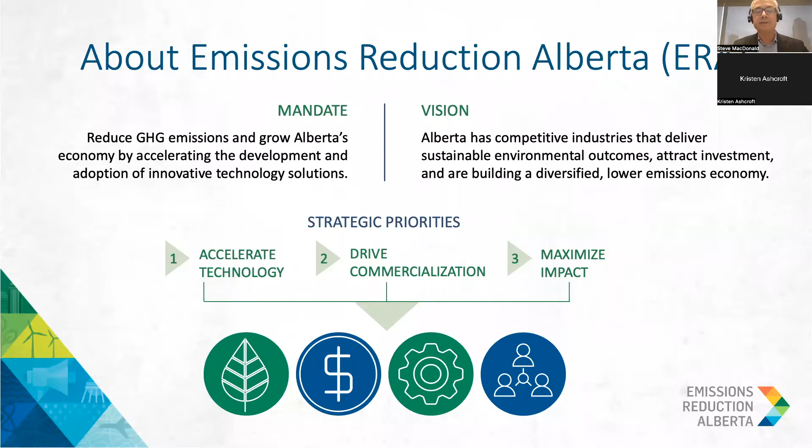We fund later stage technologies, which means we accelerate projects toward broader industry deployment and adoption by helping to de-risk those projects at the crucial pilot, demonstration, and scale-up stages of development. We're also very interested in the early stage innovation, which is why we are here today.

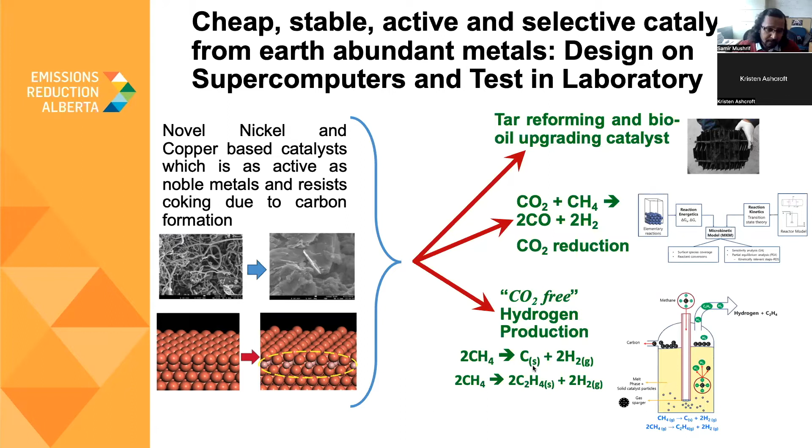So how does this support Alberta's emission reduction goals? Of course, clean hydrogen economy. Alberta is the largest hydrogen producer in Canada, with lots of interest by companies as well. But this hydrogen is produced via steam methane reforming. And the hydrogen production method that we are working on, you can call it turquoise hydrogen, if it is powered by renewable energy.

And the important thing to note here is that the catalyst that we are working on can bring the operating temperature of this methane decomposition down by about 300 degrees Celsius. It can facilitate decentralized processing.

And the other benefit is, if needed, this catalyst can be tuned to produce ethylene instead of solid carbon. The second is CO2 utilization, where we can utilize CO2 and make it react with natural gas to form syngas. And another promising technology that can bring down the operating temperature is tri-reforming.

And the other area is biomass processing and biofuels, where we are looking beyond bioethanol. And the problem here is that even the state-of-the-art technology today, if it produces bio-oil of a good quality, then the yield is only about 20%. If you take the yield up to 70 to 80%, the quality of bio-oil is poor, it has a lot of oxygen. And what we can provide is a catalytic solution to remove oxygen selectively and take the quality of bio-oil to a much better level, less corrosive, more stable.

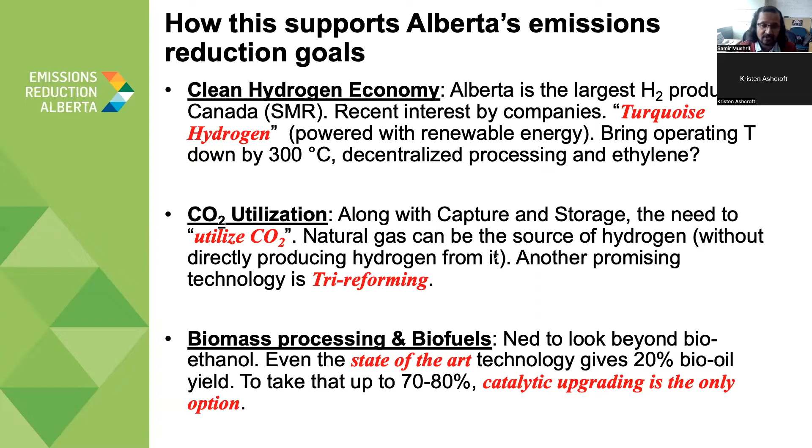And in terms of scaling challenges, we are still working at a laboratory scale right now on these catalysts. The catalyst synthesis process, testing it with real world samples, and doing further modifications and developing mechanistic understanding of the process or reactions. The challenges are to be able to develop these catalysts at a larger scale and then check the process level feasibility and techno-economic analysis.

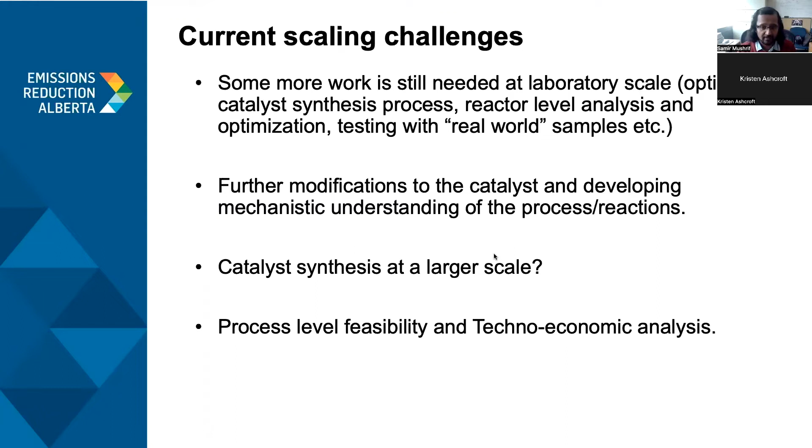And what we are expecting is some funding and collaboration to take our work to the next technology readiness level. In addition, we are also looking for opportunities to work in industry to solve industry problems. The expertise that we have in developing reaction mechanisms, pathways, and understanding can help solve some of the problems that you may have with respect to catalysts or reactions at your end.

And we have the expertise, and to perform these simulations, we have 5 million CPU hours per year to run these molecular simulations to understand mechanisms and pathways, which is about running 600 computers in parallel 24/7 for an entire year. I would like to stop here.

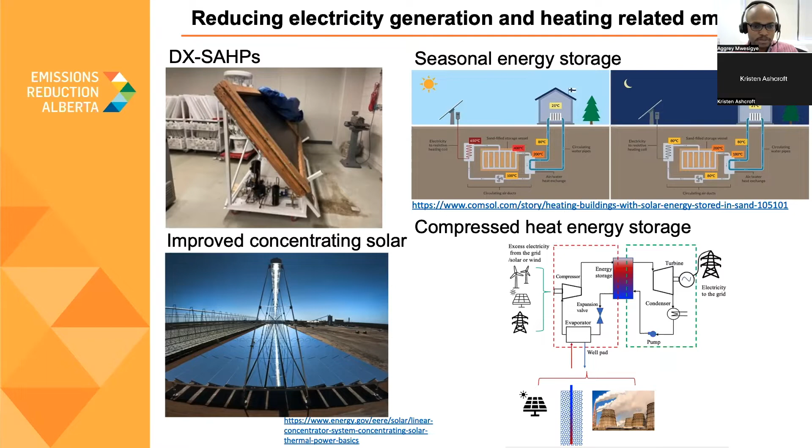Next slide. These systems support the emission reduction goals of Alberta because for buildings, we know that about 13% of our emissions in Canada come from heating and water heating, most of which comes from natural gas. So we are looking at systems that can have efficiencies between 400 and 600% and can also give you zero emissions if they are used with renewable electricity. We are also looking at solar thermal systems for reducing emissions from process heat, as well as electricity generation.

And we are working with one startup that is looking at using some of these systems for process heat in petrochemical processing plants. The other system on solar energy we are looking at is generating hydrogen from natural gas by using solar thermal cracking. And that is work related to what Samir has just presented. But in our case, we are not using electricity, but we are concentrating solar energy to achieve high temperatures that can easily crack the methane into hydrogen and carbon, eliminating the CO2 completely from the system.

For thermal energy storage, coupling the demand and supply for the intermittent renewable energy is one of the ways of increasing the penetration of renewable energy in our energy system. So we are looking at systems that we can use to store the energy from our system. Next slide.

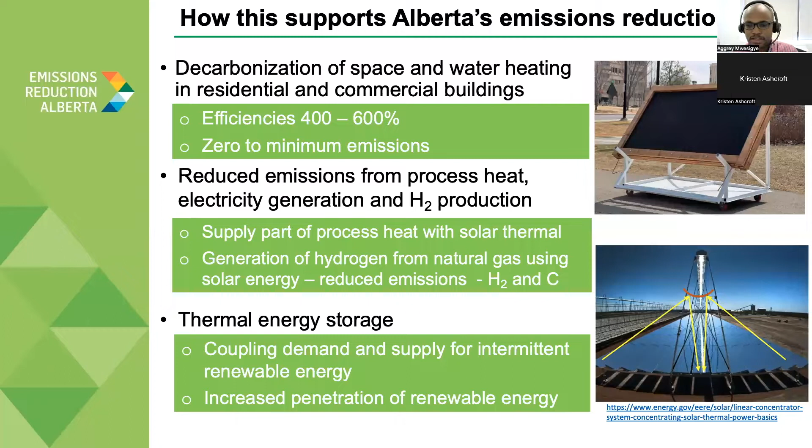So the current scaling challenges for these systems have to do with the costs, which are still higher. So we are looking at technologies that can reduce these costs and make them cost competitive. We need to demonstrate these systems in our climates. And also some of the clogging that happens for catalytic conversion of natural gas is something we are looking at and trying to address.

These are still new systems, like the compressed heat energy system is something that was proposed in 2014. So looking at sources and sinks for your energy is an important thing that we are looking at. And of course, industry and academia research partnerships are critical to success of the research that we are doing. Last slide.

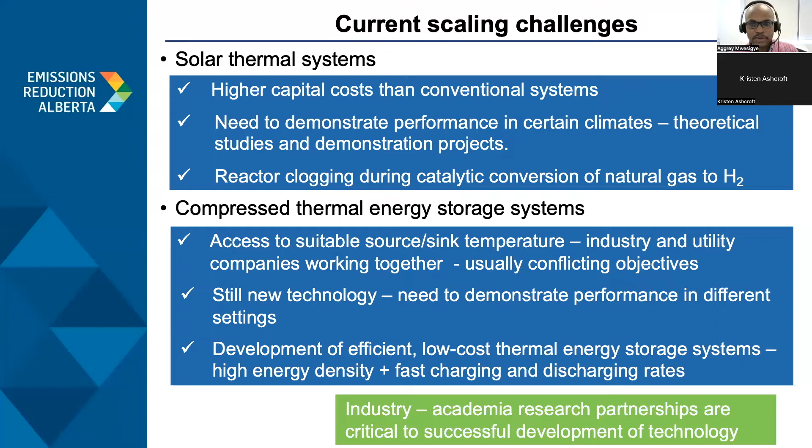So what we are looking for from this is a field test site to demonstrate the technology performance in our climatic conditions, using these lessons that are learned to develop new components and systems to improve performance, as well as develop capacity for manufacturing systems at a component level from Alberta, therefore creating jobs and reducing the costs. Also looking for industry and research partnerships for us to leverage provincial and federal research funding to fully develop these systems and utilize their full potential.

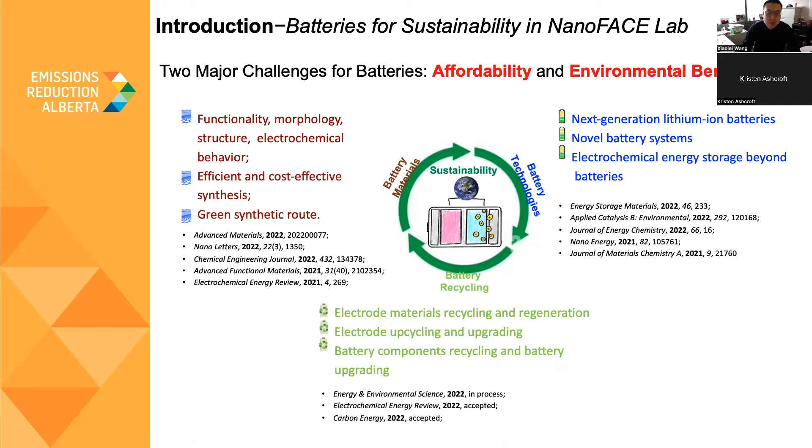Okay, thank you. So in my research group, what we mainly focus on is first the battery technology themselves, particularly zinc-ion batteries and supercaps, because zinc-ion batteries, also supercapacitors, have the same or similar battery structure to the current lithium batteries: the electrode, cathode, anode, and separator electrolyte, so that we combine them together to provide the energy for external usage. So we focus on developing the materials, cathode and anode. We focus on the electrolyte. We focus on the whole setup, the configuration of these batteries.

So in our group, for example, we make these battery technologies, the zinc-ion batteries, which can provide some of the desired properties, for example, the high capacity and the ultra fast charging. And I want to emphasize here that we don't just do some very little coin cell button batteries for lab research. We make these pouch cells so that we can further increase the active materials loading or the electrode loading to provide even higher energy of the batteries.

And since we utilize some of the available materials, for example, we use carbon as the anode, we use polymer as the cathode, both of them are very cheap, so that the batteries hold high potential for practical applications. And the batteries that we fabricate in the lab can provide very high loading. Typically, we can realize mass loading over 50 milligrams per centimeter square, which is much higher than that of typical lithium batteries, for example, only 2 to 10 milligrams per centimeter square.

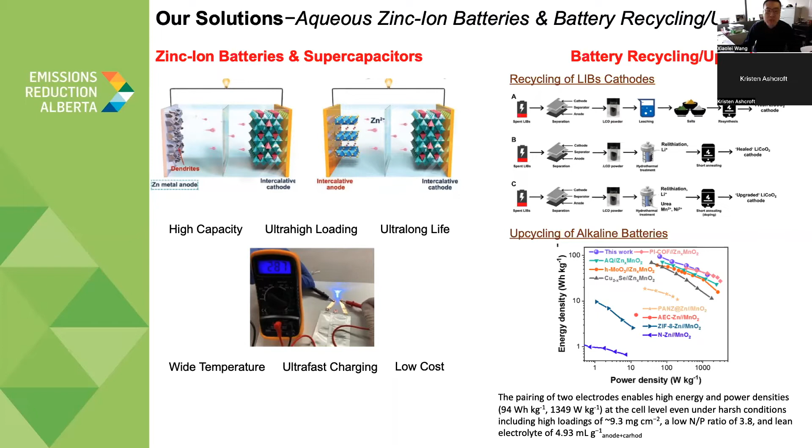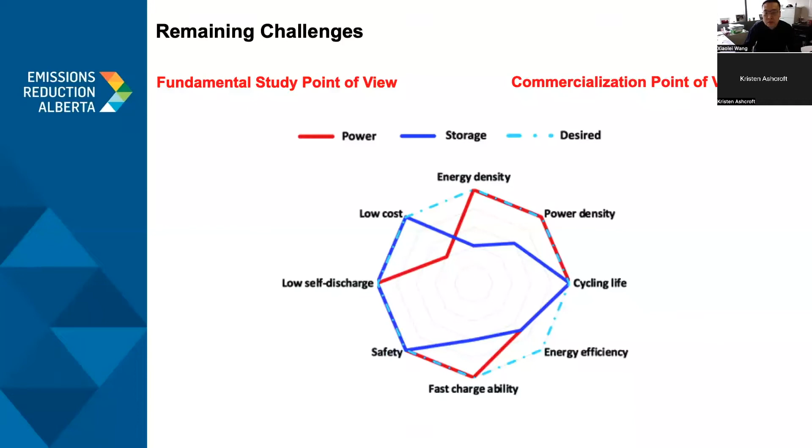So the remaining challenge is, I just mentioned a little bit, if you take a look at this figure here, we still have a long way to go to realize the practical use or commercial demands. And next page, please. So our expectation is that from the fundamental research point of view, we still want to explore different materials, explore different possibilities. And for the practical applications, we would like to collaborate with our industry partners to leverage funding from provincial or federal agencies. We also would like to collaborate with our industry partners to see the real possibilities of commercializing these battery technologies or some of our recycling strategies. Thank you.

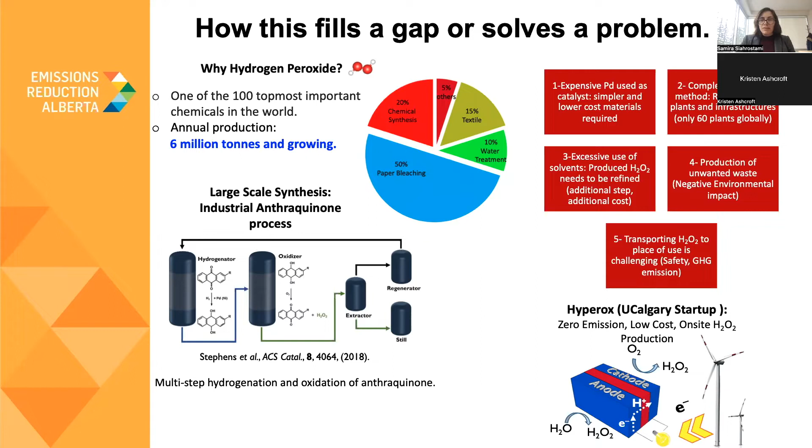Now, our technology solves all of these issues. It's a zero-emission, low-cost, modular, on-site production of hydrogen peroxide. As you can see schematically here, we're using renewable electricity. Our only raw material is water. We are not using organic solvents here. We produce hydrogen peroxide and hydrogen, which can then be used for reduction of oxygen to hydrogen peroxide. In fact, it's a two-sided production of hydrogen peroxide with 200% efficiency, and it's very useful for local applications. Next slide, please.

Now, in terms of how this addresses Alberta's emission reduction goals, it's a new technology based on an electrochemical device, and it's modular, low cost, with no waste, and there's no GHG emission in our technology, and it reduces the GHG emission of large facilities for hydrogen peroxide synthesis. One particular application of this technology, as you can see schematically here, is a solar wind distributed water disinfection system, but it's not limited to this application. It can be used for treating agricultural water and making it cleaner for agricultural products. Next slide, please.

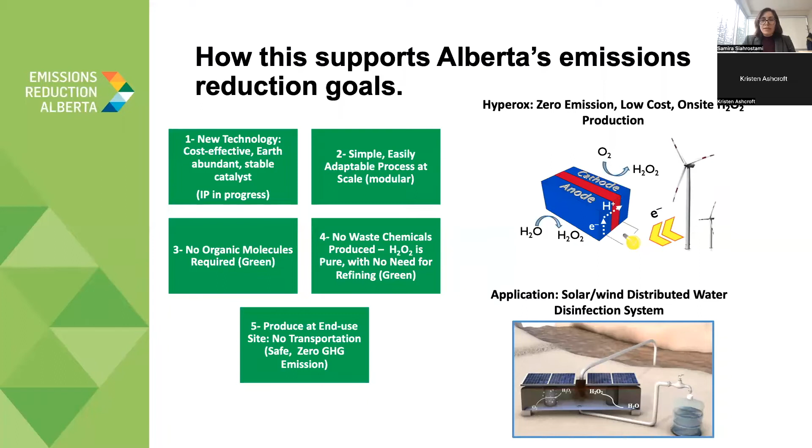Now, in terms of our current challenges, we have this lab-scale EChem cell, and as you can see, it works perfectly fine. Our current challenge is to adapt this technology into a medium-scale and then large-scale EChem cell. This is an existing technology in Dr. Gates' lab, and we are transferring this technology to a modular medium-scale EChem cell. On the bottom of this slide, we have the plan for the two years of the startup company.

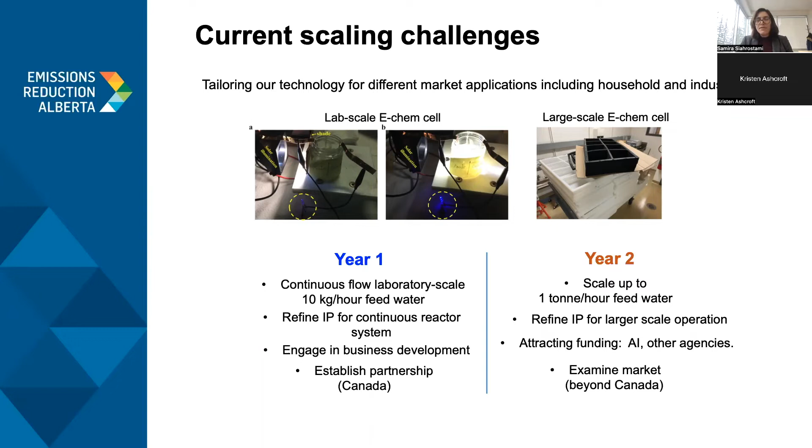In the first year, we want to work on the continuous flow laboratory scale that takes a 10 kilogram feed of water. We want to refine our current IP for a continuous reactor system, and we would like to engage in business development and establish partnerships within Canada. In year 2, we want to scale up our technology to a 1 ton per hour feed, refine our IP for large-scale application, and attract funding from Alberta Innovates. And we would like to, of course, examine markets beyond Canada. Next slide, please.

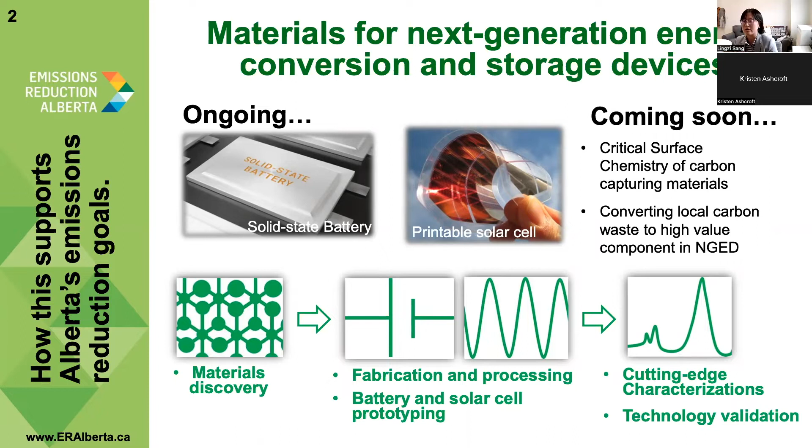This is often called technology validation in industry, and we actually have our initiative. We actually started our little industrial initiative, and we're looking for partners as well. Next slide, please.

And we have this full array of capabilities, starting from material discovery, the material synthesis, to environmental boxes, a couple of them, where we can do device prototyping, and to tools that you can use to do electrode deposition to make prototypes, and down to electrochemical working stations that you would use to characterize the performance of the batteries and solar cells.

And then most importantly, this center actually funds a few cutting edge characterization tools, and most of them are home built, right? And we're looking at molecular level details using advanced vibrational spectroscopy. And for example, the top one there, the specialized FTIR tools that we use for surface chemistry can help us to look at one single layer of molecules on top of a surface.

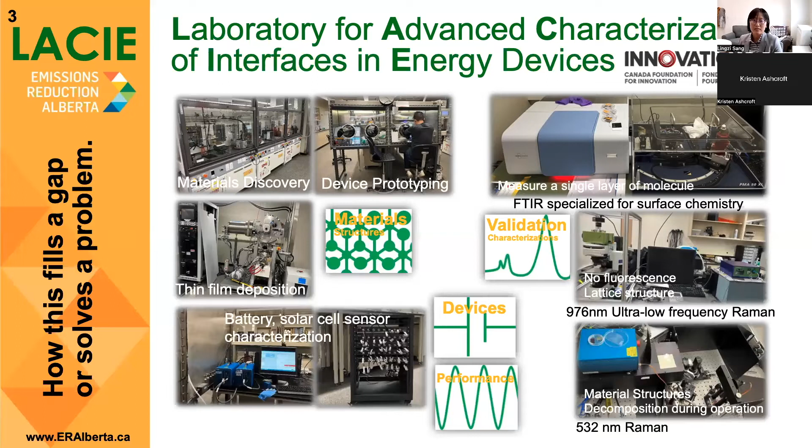So this is a project that is at its infant stage right now, and is funded by Alberta Innovates, and is right now in the process of the material processing and the solid electrolyte membrane development. And we're looking towards, in the next few years, building battery prototypes in the solid state and building stackable batteries, and then trying to navigate with the industrial partners and look at properties that the industry really cares about. So next slide, please.

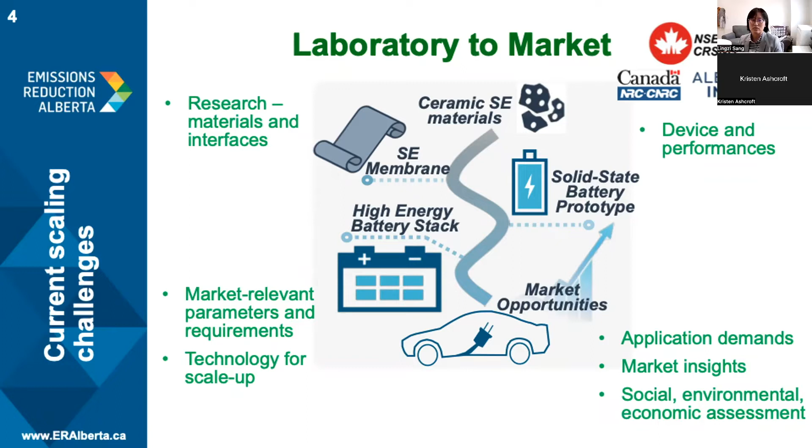Okay, so the next step would be what we actually need from the pilot, and indeed it's the partnership. So we know everything about the material and the devices, and we do the characterizations, we understand the structure, we understand the performance, we also have a full array of validation for these devices and the material. However, what we really need is to understand in different applications the exact parameters that this material would actually need when it's pushed into the market.

For example, when they're used in healthcare devices, what you really need would be a smaller size and the flexibility and the compatibility with biological systems. Well, in a grid storage system, the size is not really of a concern. The amount of energy that can be stored would be of great concern. And in an EV system, the electric vehicle system, it will be somewhere in between. The size and the energy density would be very important.

To have a partner within the industry would actually help us to provide us with the feedback so that we can start off with the application-oriented technology development. Okay, so I think that's my sharing here, and I would like to hear questions afterwards.

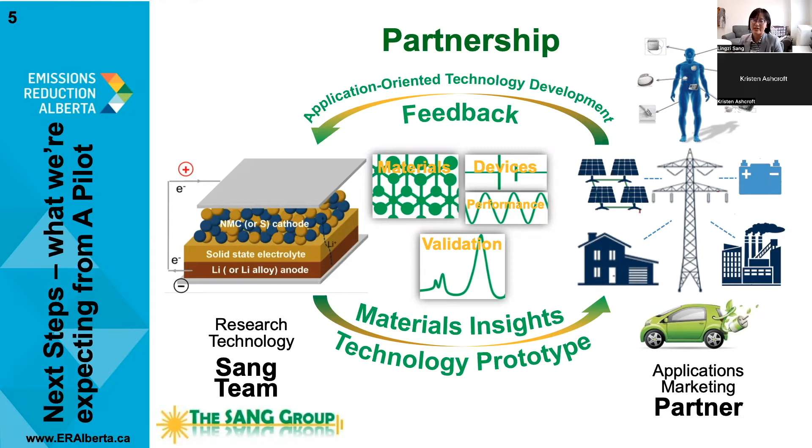My name is Joanna Wong, and I'm assistant professor in the Department of Mechanical and Manufacturing Engineering at the University of Calgary. Today, I'd like to talk to you about one of the major focuses of my research in additive manufacturing of fiber reinforced polymer composites.

So most of you are probably familiar with composite materials. You'll probably know them as fiberglass or carbon fiber. And these materials are highly used in lightweight applications such as airplanes, as well as wind turbine blades. And they're also quite interesting for biomedical applications such as prosthetic lower limbs.

Now, the issue with composite materials and composite processing is that they are, compared to other materials, highly expensive. This is due in part to the cost of the raw materials themselves. Carbon fiber currently sells for about $20 per pound or so. But when you actually go to purchase a composite part, say $100 per kilo, 80% of that cost is going to be in the processing. And the cost really comes from the dependency on the tooling, very expensive molds, and highly laborious processing methods.

So one way we hope to make lightweighting technologies more accessible to different applications is to take advantage of additive manufacturing's ability to circumvent the dependency on molds, or at least reduce the dependency on molds, and therefore reduce the cost while increasing the design freedom. And by allowing for this type of processing, we can then adopt more energy efficient designs by lowering the weight or increasing the functionality of certain structures. Next slide, please.

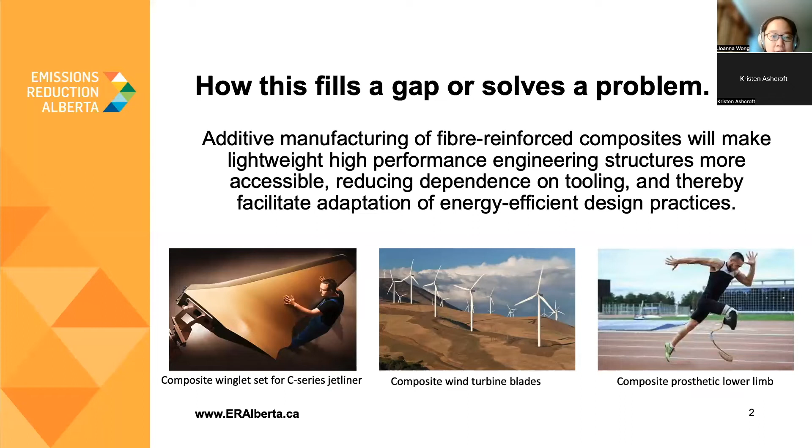Now, my lab is really looking at reducing waste and reducing energy from the whole manufacturing chain, from the raw materials to the preforms, to the actual manufacturing process, and then finally in the design of the structure. One example is when we're looking at the raw materials, we want to be sourcing from sustainable materials. I'm part of the Alberta Innovates Carbon Fiber Grand Challenge, where we're trying to take asphaltenes from Alberta and convert them into higher value carbon fiber products.

Another thing we're looking at is the use of natural fibers such as flax or mycelium from fungus, and seeing their properties and how they can be used to create a more sustainable composite material. Flax, for example, the specific strength of the flax fibers is on the same order of what can be achieved with fiberglass.

I've also done some work on preforms. Currently composite processing is heavily dependent on expensive preforms such as prepreg materials and autoclave processes, which are used, for example, in making the Boeing 787. And in order to bring composite materials to larger mass manufactured markets, we really have to look into lowering the cycle time of composite manufacturing down to less than 1 minute per part. So this involves manufacturing processes such as stamp forming, which requires new approaches to developing preformed materials.

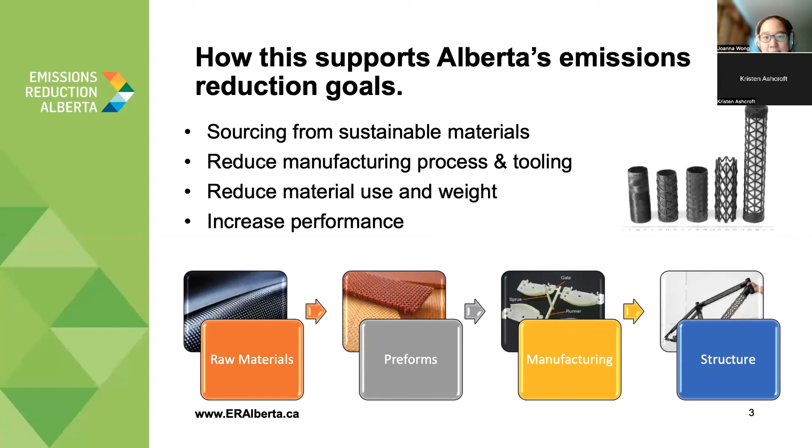Now, I'm also looking at manufacturing, one of which is the additive manufacturing process. In the top right-hand corner, you can see these lattice type beam structures, which are very difficult to make manually or with molds, but relatively easy to do using an additive manufacturing process. And these lightweight beam structures can be used, for example, in bicycle frames or in deployable booms for satellites. And overall, by reducing material use and weight, we hope to also increase the performance and weight saving abilities of structures. Next slide, please.

And there's very well-known correlations between the strength of a component and the void content. And so above, say, 2% of void content, the mechanical properties of a composite material will drastically decrease. The standard for aerospace components is less than 2% void. So you can see that there's a huge gap that we have to move from additive manufacturing quality down to what is acceptable for an end-use part.

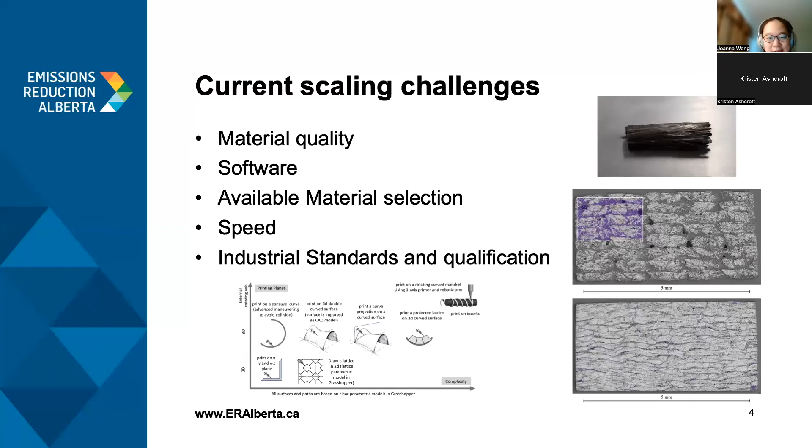We'd love to start a partnership with local industry members in helping integrate the additive manufacturing process into a manufacturing line and incorporate sustainable materials in your products, as well as increase the functionality of your materials and structures.

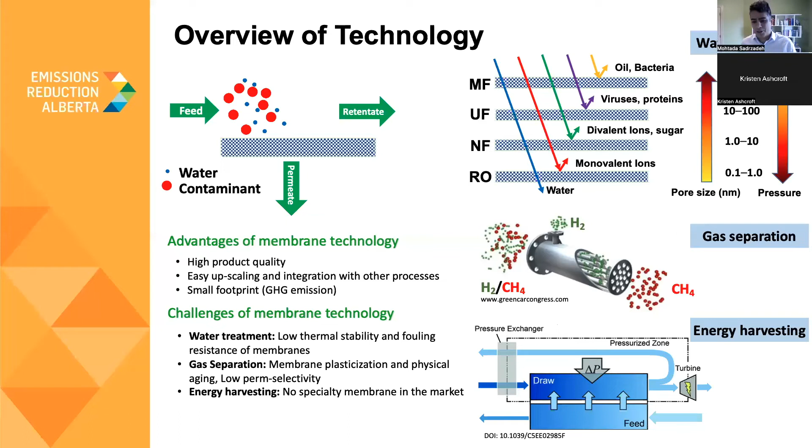There are many industries that deal with high temperature process streams. Our thermally stable membranes have the potential to improve heat integration in these industries by conducting the water treatment at high temperature and preventing cooling and reheating requirements. For example, by replacing the conventional water treatment process in a steam-assisted gravity drainage, which is used for oil sands extraction in Alberta, with our thermally stable membranes, the GHG emissions can be reduced by almost 10%.

In the case of biogas upgrading, the carbon intensity of the membrane process is as low as 36 gram equivalent CO2 per megajoule of the produced biogas. A rough estimation shows that replacing natural gas with biogas leads to a net emission reduction of about 40 million tons of equivalent CO2 per year. Finally, pressure retarded osmosis for energy harvesting is a renewable and green technology with zero carbon emission to the environment.

In AWRL, we are manufacturing both flat sheet and hollow fiber membranes that can be used for both water treatment and gas separation applications. Can we go to the next slide?

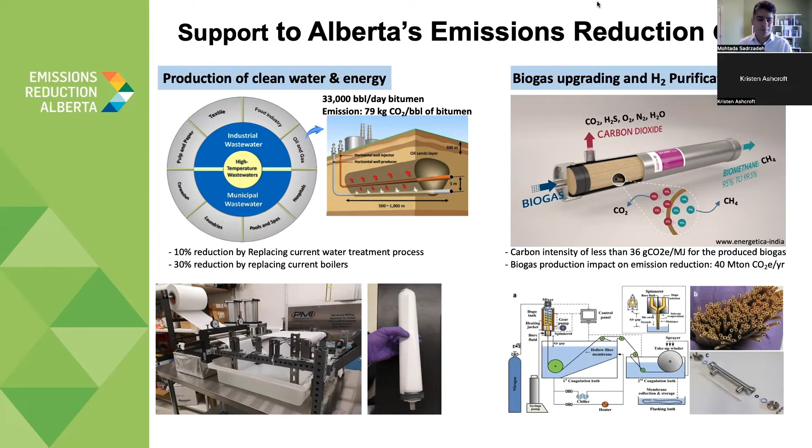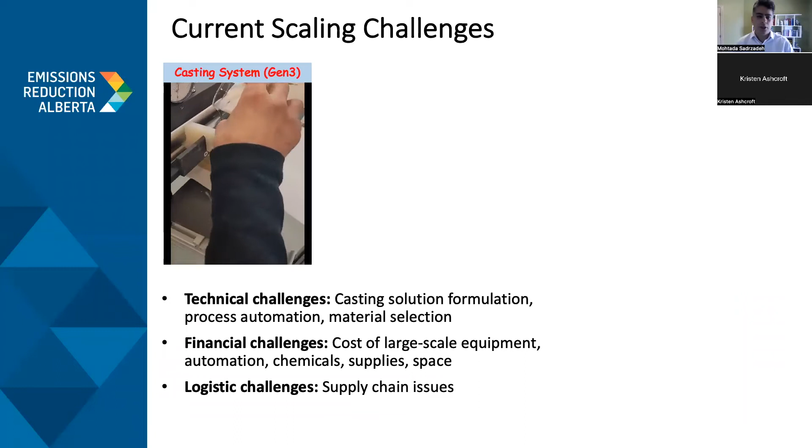We have already started manufacturing larger scale membrane and understand the current and future challenges. This video shows the third generation of our membrane manufacturing system. Using this system, we fabricate microfiltration and ultrafiltration membrane by casting a polymer solution, which is indeed our intellectual property. That casting solution will pour on the support.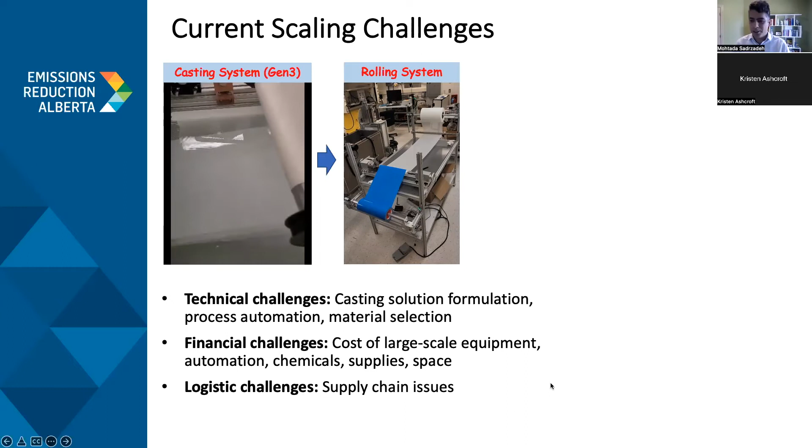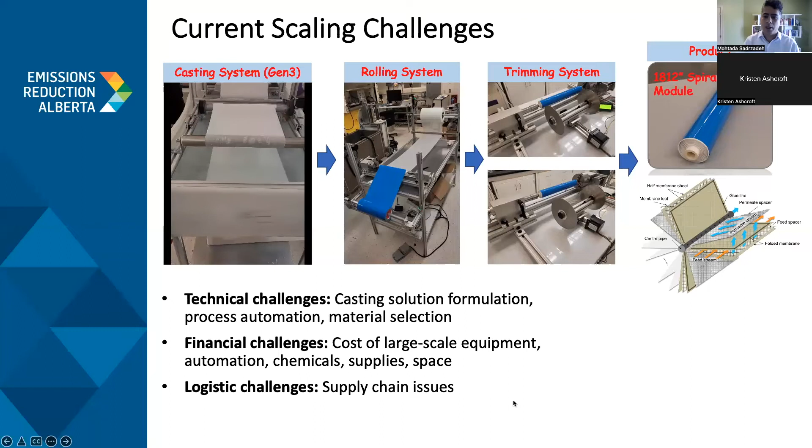The process, next click, please. The process, in fact, includes casting, rolling, cutting, and trimming. The final product is the commercial scale 18-12-inch spiral wound module. The preliminary tests showed that this membrane can separate humic acid from wastewater by more than 90% rejection, and the flux is as high as 320 GFD.

The technical challenges related to the casting solution formulation and manufacturing process design are already resolved in our lab. We predict some financial and logistic challenges for the mass production of these modules using a larger scale, fully automatic process. Next slide, please.

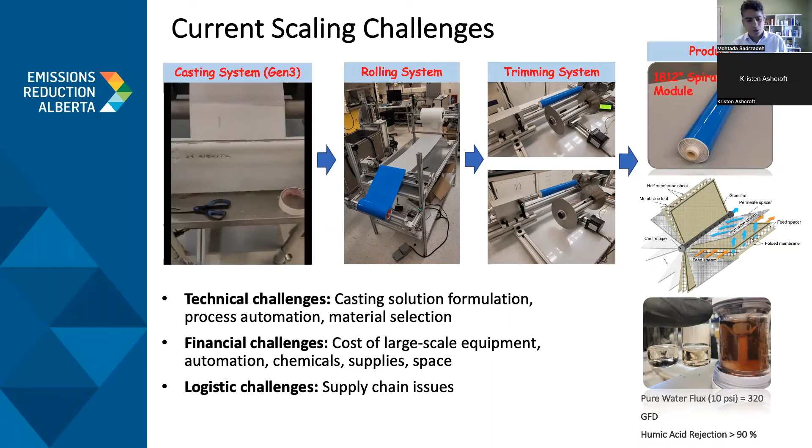The main risk for the successful deployment of our technology is the absence of a testing platform for the manufactured membrane. In the last 3 years, we designed and constructed membrane filtration setups for high temperature water treatment and energy harvesting from wastewater to mitigate this risk.

Other risks that we anticipate are regulatory risks, for example, permit for field trial, budget-related risks for mass production and having higher scale manufacturing, and human resource risks. All these risks are important and of course are relevant, but we believe they are manageable by having some mitigation strategies in place. Thank you very much.

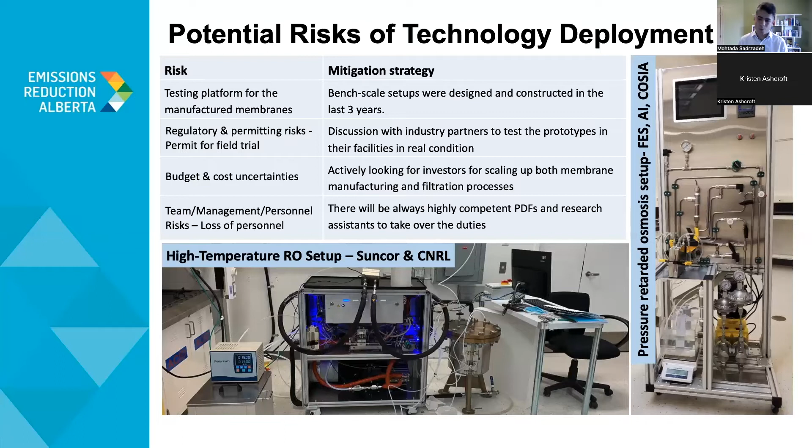Hi everyone. So my name is Michelle Dolgos and I am in the chemistry department at U of C, and we work on synthesizing and characterizing new piezoelectric materials for different energy related applications. Next slide. So first, for anyone who's not familiar with the piezoelectric, it converts between mechanical and electrical energy and vice versa. So you can either apply a force and it generates an electric field, and in that case, it can be used as a sensor, so something that detects changes in the physical environment, like a pressure sensor, gas sensor, accelerometer, and things like that.

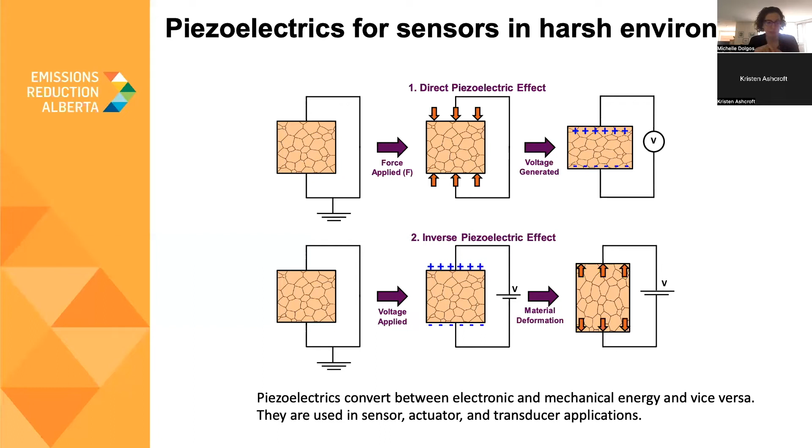And then that's also reversible. So you can apply an electric field and then the material will actually physically distort. So in that case, it's used in actuator applications where it converts that electrical signal into a precisely controlled physical displacement. It's used to control hydraulic valves, small volume pumps, special purpose motors that require precise movements and things like that. And then it can also be used as a transducer device, which actually does the conversion between mechanical and electrical energy. And that's used in ultrasonic imaging, strain gauges that measure force, stress, vibration, and things like that. Next slide, please.

So the challenge in this space is that the industry standard piezoelectric contains lead, which is toxic to the environment, and it also has a low operating temperature. So it can't be used really above 100 degrees Celsius. But one of the challenges is that the piezoelectric response, so how well it responds to the stimuli, is inversely proportional to its maximum operating temperature. So we've worked in two spaces here.

So we're looking at thin films, and we've been able to synthesize a thin film material using an environmentally friendly synthesis technique we've developed using aqueous solution. For the precursor solution, as well as the synthesis technique, we're in the process of the full patent application right now. That particular material does not have any lead in it, and it also works at a higher temperature than the industry standard.

And because this thin film material doesn't have lead, it has the possibility to be used in vivo, so in a biomedical device like a pacemaker, where it can detect the level of physical activity. So then that device can be adjusted as needed. It can also be used as an ultrasonic sensor, and a vibrational energy harvester.

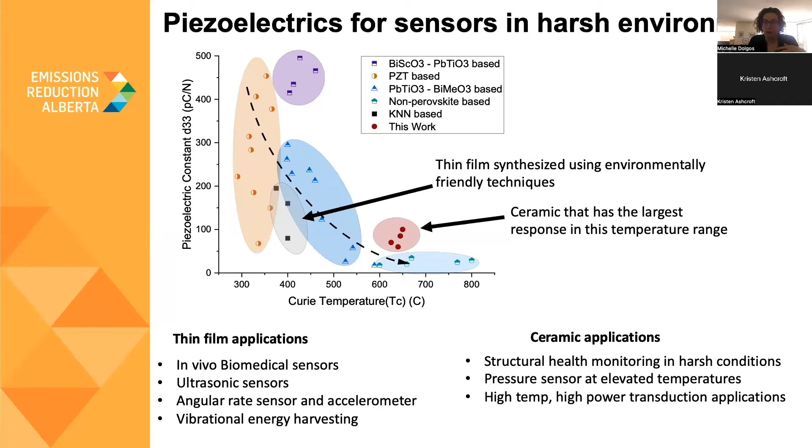We've also synthesized a novel ceramic piezoelectric material that we're in the process of applying for a provisional patent for. This material has a higher operating temperature of about 600 degrees C. And you can see on the plot that our ceramic has a larger response, so it's more sensitive than other materials that have that similar maximum operating temperature. So this ceramic can be used in things like structural health monitoring at high temperatures, a sensor at high temperatures, and anything really that's used at elevated temperatures that also needs high power transduction applications.

Next slide, please. So the ways that this supports Alberta's emission reduction goals is that we've been able to come up with an environmentally friendly synthesis technique for our thin film. So it's synthesized at lower temperatures, and also the annealing time goes from an hour to about a minute. So we have significantly reduced energy needs to make these thin films.

And then generally when you do solution processing of thin films like we are here, you use nasty organic solvents, but we've been able to do this using aqueous solution chemistry. So there's no waste really.

For both the thin film and ceramic materials, this could be used as an energy harvesting device, which is really cool. So like at a train station in Tokyo, the tiles are lined with piezoelectric devices. So every time you step on it, it creates an electric field, and then they can save that energy and store it for use in the lighting in the train station or something like that.

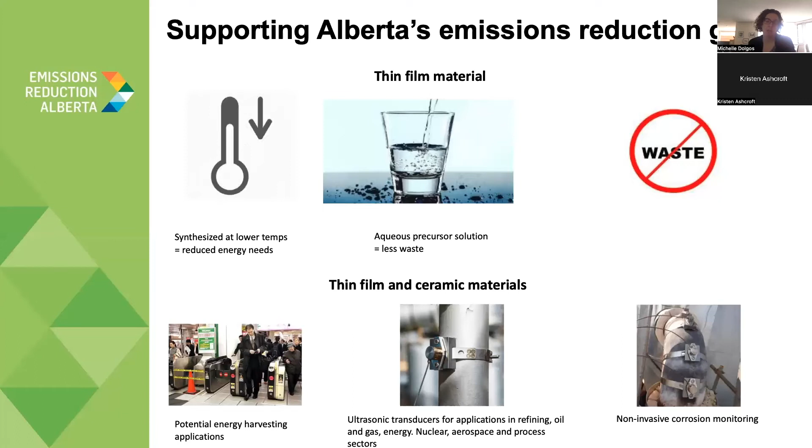And then it can also be used for sensing in manufacturing facilities. So any type of manufacturing facilities, it can be used for sensing at higher temperatures.

Next slide, please. So some of the challenges for the thin film material is scale up. So right now we do spin coating, and we just use this tiny little spin coater that fits in the hood of our lab. But in order to scale up, we likely need to do something like spray coating, and that requires equipment that we don't have access to. I don't think there's anything here at Calgary.

And then for the thin film and ceramic material, we're looking at adding small amounts of different types of atoms to try to tune the material and optimize the properties. And I think in both the thin film and the ceramic, we're at a point where it's beyond fundamental research, because we're trying to figure out how it can actually be used in optimizing properties, but it's not quite ready to be a startup or something yet.

And that's an area where funding can be difficult to find when you're in between fundamental and then starting a company with something. So that's a little challenging as well. And that's for both these materials that we're working on. Next slide, please.

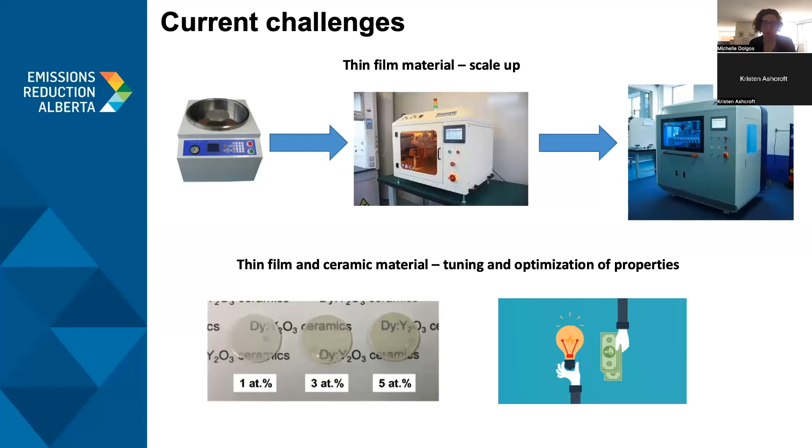We can do in operando battery measurements, where we look at how the structure changes for charging and discharging a battery material. And I just wanted to mention this because this is something we would be interested in either consulting or collaborating with others on.

I think it's really important if you have a material and you're trying to understand the properties or change the properties to tune something for a specific application, a good way to understand the direction that you need to go in is to understand the atomic structure. And that's something that my group has high expertise in. So this is something that we like to work with people on collaborations with as well. And that's all I have. Thank you.

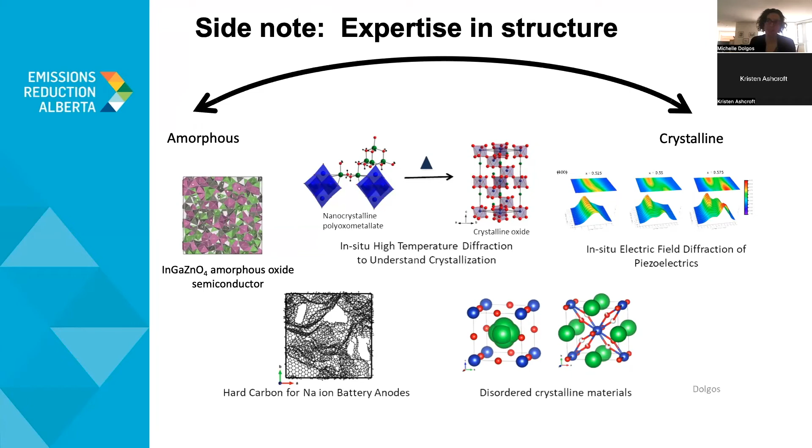Great, thanks, Michelle. And thanks to all of our researchers, especially for staying on time. I know that there's a lot to cover and we haven't even scratched the surface. So thanks again. It's very exciting to see the potential in all of these research areas and in what you're doing. The intent of this session is to connect these research areas and the expertise with those working in industry to see where the possibilities may lie.